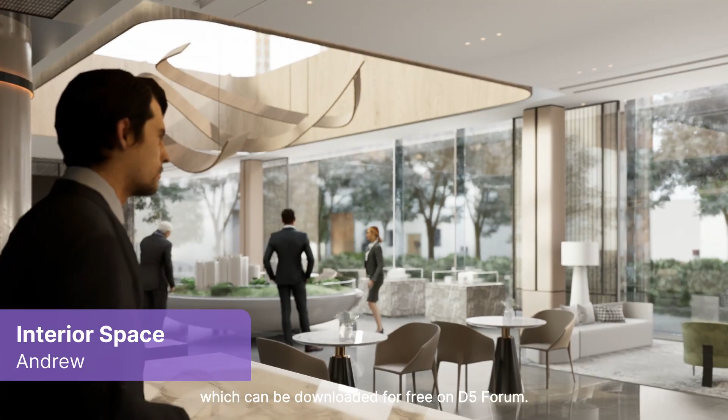Okay, let's have a look at the UI of D5 Converter for 3ds Max. You'll see 8 buttons on the panel. The first one is Start.

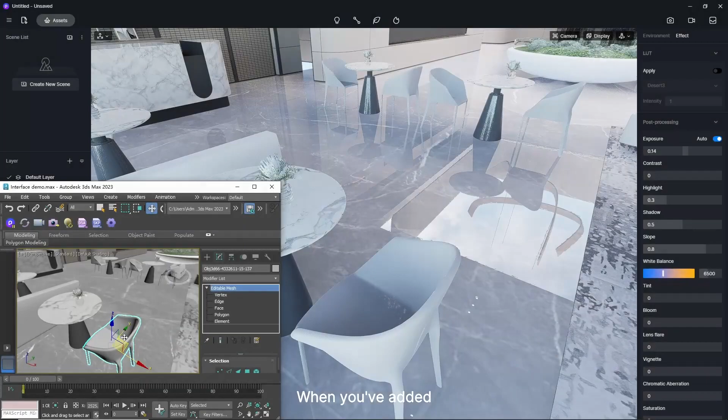Click on it to launch D5 Render, and the selected viewport in Max will be synchronized to D5. When you've added, edited, deleted models, or edited the materials in Max, these changes can be synchronized into D5 by clicking on this Sync button.

Next, we can click on the View Switch button to enable or disable Livesync of the viewports between Max and D5. Turning it on helps you observe and modify the models from any direction.

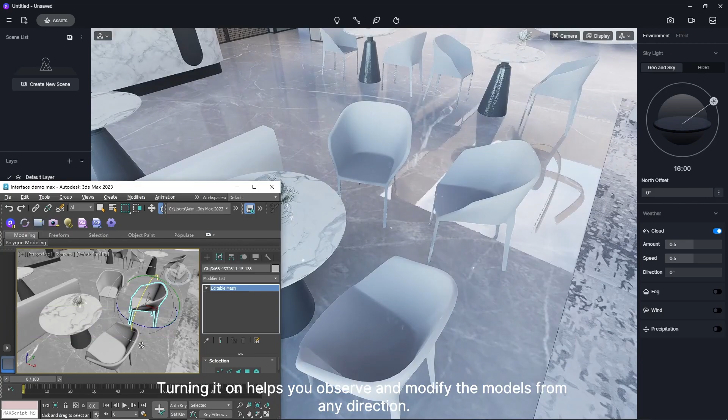The cameras in Max can also be synchronized into D5 with one click on the Send Scenes button, and you can adjust depth of field, camera clipping plane and other camera-related parameters later in D5.

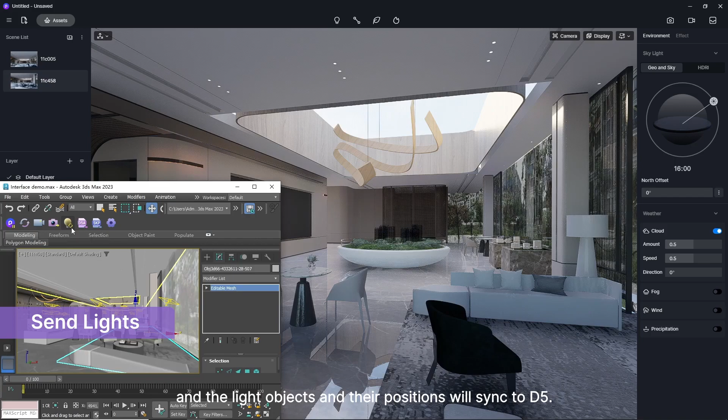To sync light objects, you just need to click on Send Lights, and the light objects and their positions will sync to D5. Further adjustments of these light sources are also available in D5.

From the Settings button, you can check the version number, change global settings, and select your ideal sync method.

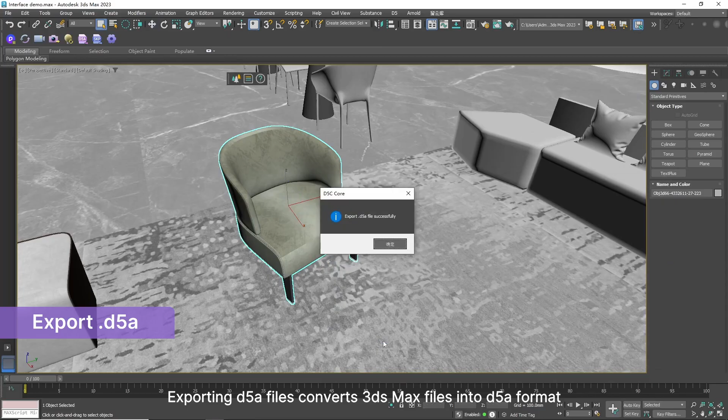Exporting D5A files converts 3ds Max files into D5A format, which is readable by D5. It brings the models and materials perfectly into D5.

Besides, exporting SKP files is supported as well, so it can be opened in both SketchUp and D5.

Now let's dive into 3ds Max D5 workflow with this streetscape scene. Here's the final result for preview.

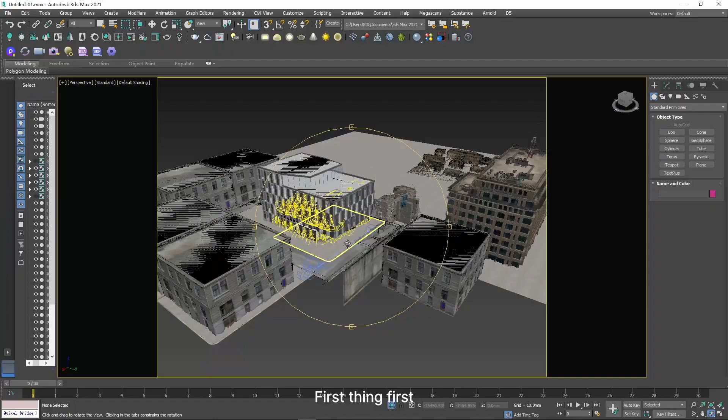First thing first, check your models. Looking at the scene, there appear to be multiple types of materials, including V-Ray standard, multi or sub-object materials. Don't worry, all of them can be mapped into D5.

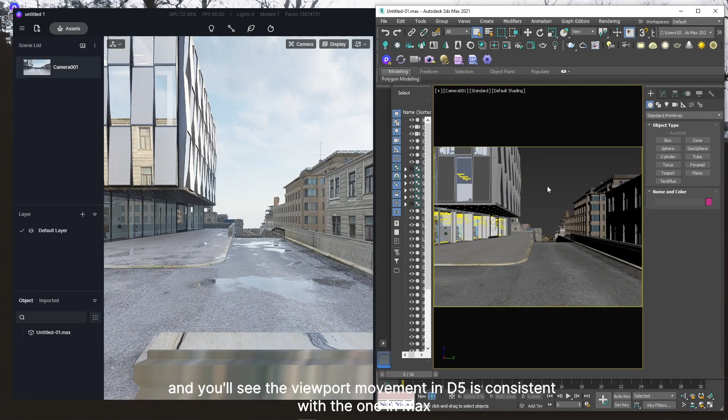Click on Start to sync the main building to D5. Click on View Switch, and you'll see the viewport movement in D5 is consistent with the one in Max, so it should be really convenient to view and modify the model.

After confirming all the models and materials have been synchronized correctly, turn off auto exposure in D5. Then you can start adjusting the materials based on what you have in mind.

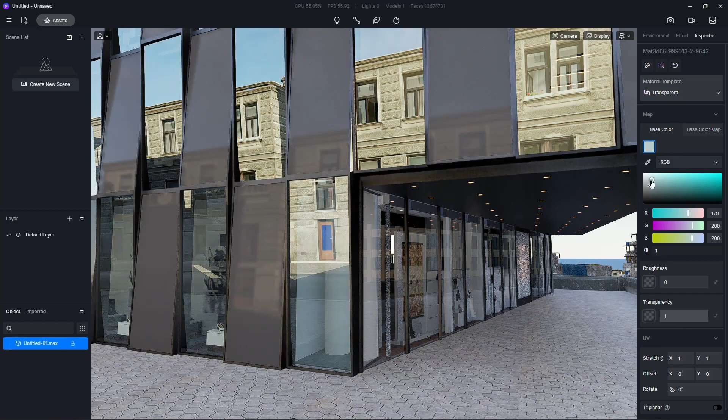Click on Send Scenes. Then you'll find all of them synced into D5.

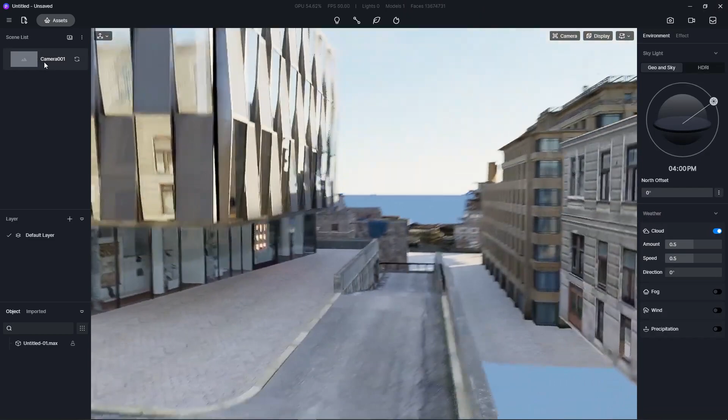Even for models with a large number of lights, D5 Converter and D5 Render can handle them with ease, as well as keeping their hierarchy. For duplicated light instances in Max, they will be synced into D5 as light groups, very convenient for group editing.

Next, let's look at the scene and fill it with appropriate assets.

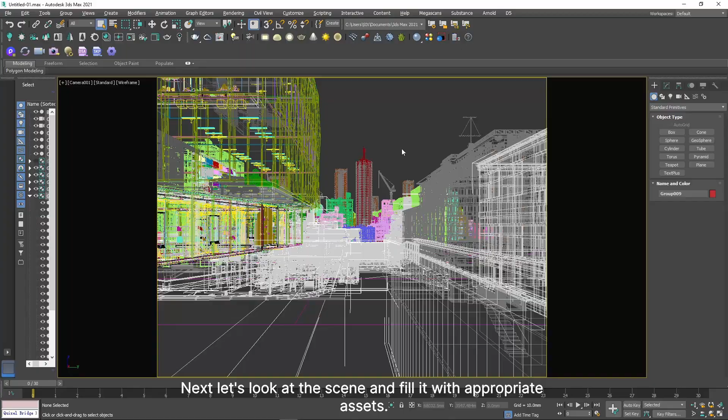To export models and materials from Max, it would be better to click on Export D5A, because D5A format makes it easier to edit the model or reuse it in other projects later. What's more, in D5 you can sync the original coordinates of the model by clicking on Sync Coordinates.

Or you can click on the models, then use Align feature to keep their relative positions consistent. Take a look and make sure everything's okay. For models you want to use in other projects, just add it to your local library.

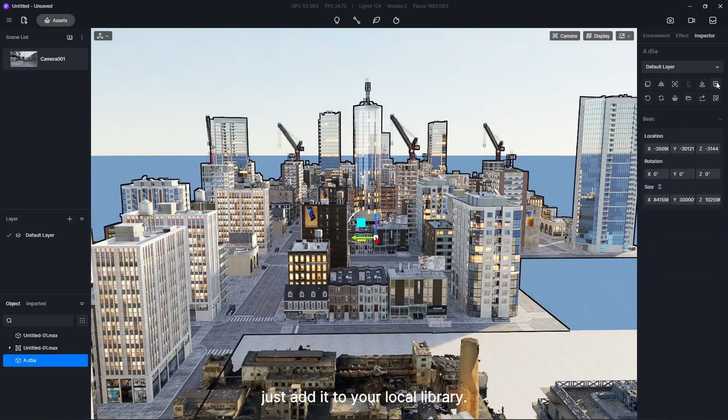For materials in this scene like glasses, you can adjust them if necessary. After that, turn off Max and save the D5 scene file.

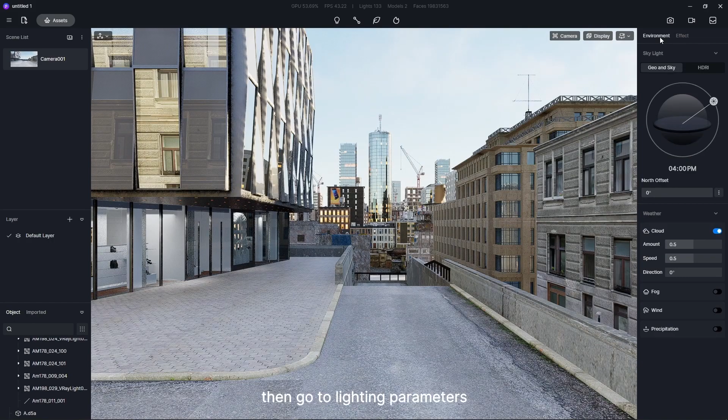It's time for more adjustments in D5. Press L to hide light source icons. Turn off auto exposure. Adjust the general atmosphere. Then go to lighting parameters for specific adjustments according to your scene.

In the demo scene, we're using HDRI with certain adjustments in the weather system. You can also use Geo and Sky.

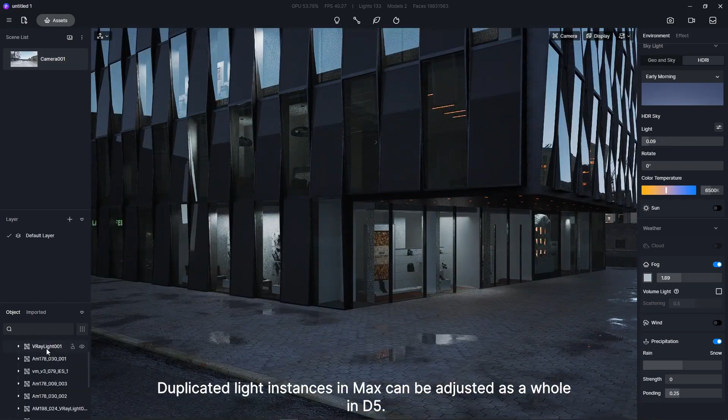Adjusting parameters in the effect panel, including LUT, exposure and especially bloom, which adds a halo effect to the emissive materials near the camera, can help you simulate a city scene when it's getting dark. Duplicated light instances in Max can be adjusted as a whole in D5.

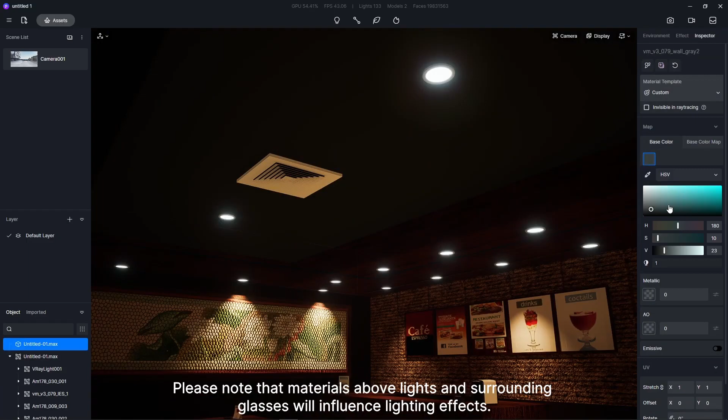Please note that materials above lights and surrounding glasses will influence lighting effects. If the lighting from Max is not enough in the scene, you can add light sources in D5 as supplemental lighting. We recommend rectangular lights to light up a large space and point lights for a particular area.

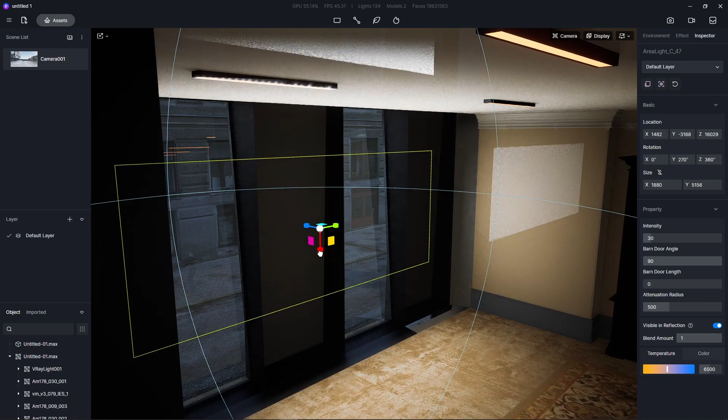Then take a look at the overall result. You might need to adjust the color temperature of glass and lights for a harmonious atmosphere. And then adjust the materials according to the lighting you have.

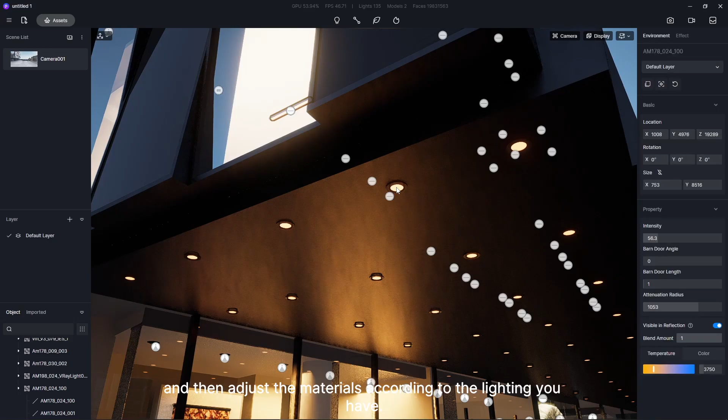Emissive materials can be used together with spotlights. Remember to adjust the cone angle of spotlights. Place them evenly, and avoid adding too many lights to a single scene. To manage the light sources in D5, you can use box selection and control-click to quickly select the lights you need, and group them by pressing Ctrl-G for easier editing.

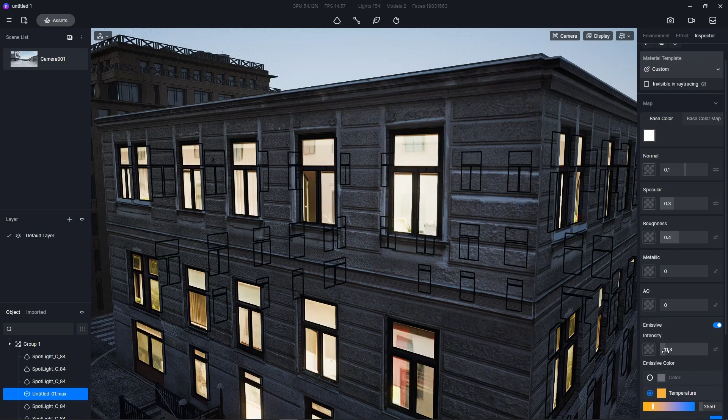Next up, let's import some assets from Max to fill the exterior space. Of course, you can always stick with D5's built-in asset library that is constantly updated. Choose what you need from an extensive range of D5 assets, add them to the scene, and then adjust them as you like. For example, you can turn on emissive for the material of the streetlights in this scene, and add a spotlight here to work with it.

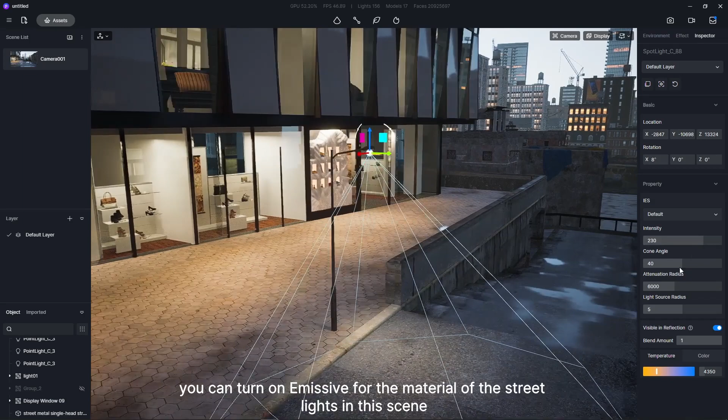To further enrich the scene, you can choose some exterior assets for commercial scenes, and decals from D5 Asset Library. D5 Asset Library makes it much more convenient to place and adjust models in your scene.

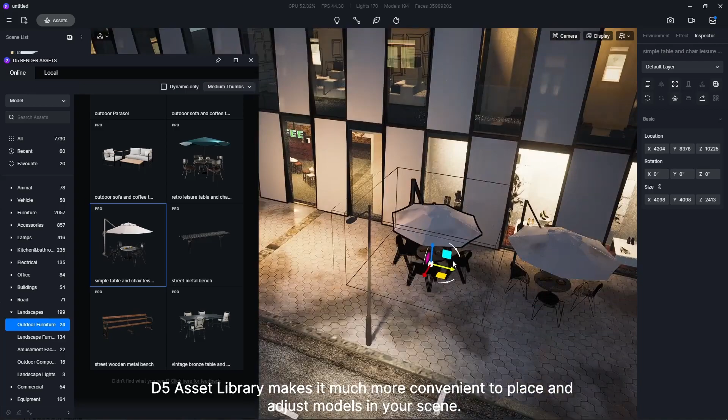Another convenience is its dynamic models, such as the bird's swarm particle used in the demo scene. Flying direction, quantity, velocity, and other parameters are adjustable.

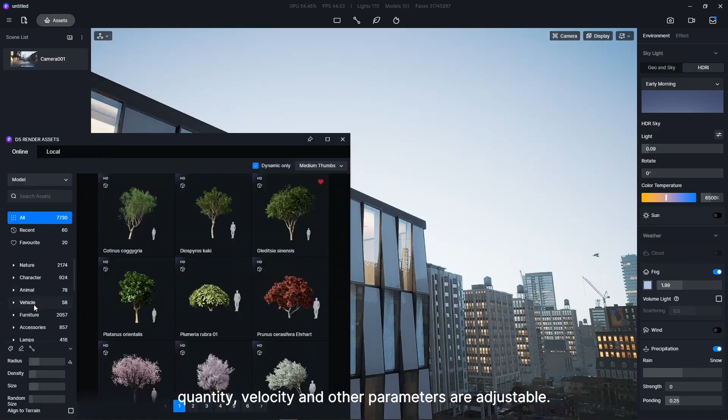Moving on to plants. In this scene, we're using the brush tool to add conifers so that the building and the surrounding environment won't be obscured. You can test on a small scale to see if you get the right effect, and then apply it on a larger scale.

For places near the camera, you can add dynamic trees for better result. When you're done, you can add some lights to enhance the sense of depth of this space.

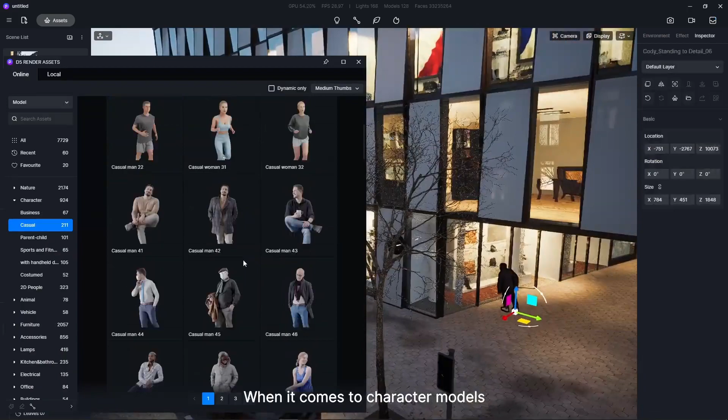When it comes to character models, it would be better to have more people in the distance, and less of them near the camera. Another tip is to take into consideration the season and ornaments you have when selecting characters. Same with plants, I tend to use static figures far away and dynamic ones nearby.

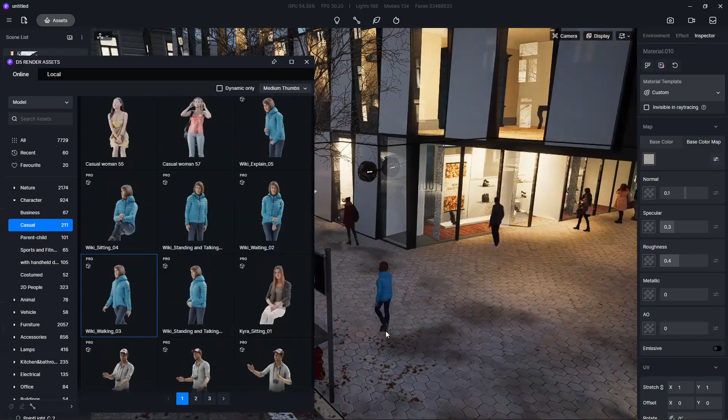You can turn off the real-time option when you are placing dynamic figures. You should avoid characters gathering in the same spot, and try to place them evenly. Also pay attention to whether they fit into the environment.

The final step is animation making. After setting the shot, adjust the easy ease and camera transition duration. Back to the first shot. Observe the characters, and add a keyframe. Remember to turn on rate matching.

Go to the last shot. Add another keyframe. And click on the play button. Now we've created a walking character.

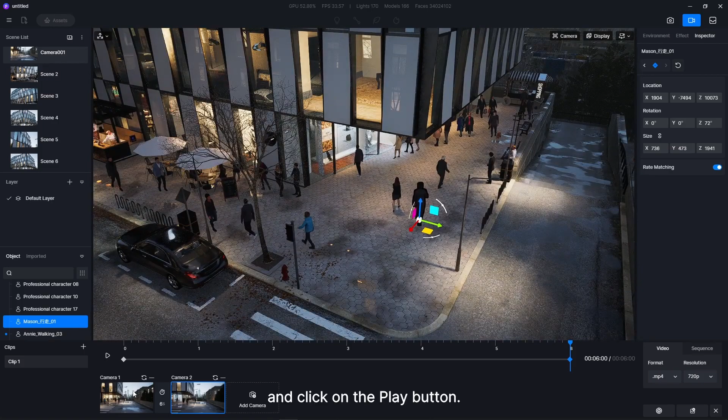Be careful of where they're going because you don't want people to run into each other. Copy the clip to duplicate the character's movement. Update camera shots after they're adjusted. And you have a new clip.

Select the channels and adjust export parameters. And you are all set to render. You can also add the clips to render queue for batch rendering.

That completes our tutorial for the real-time workflow of D5 and 3ds Max. Feel free to download the 2 demo scenes in this tutorial in Scene Express and D5 forum.